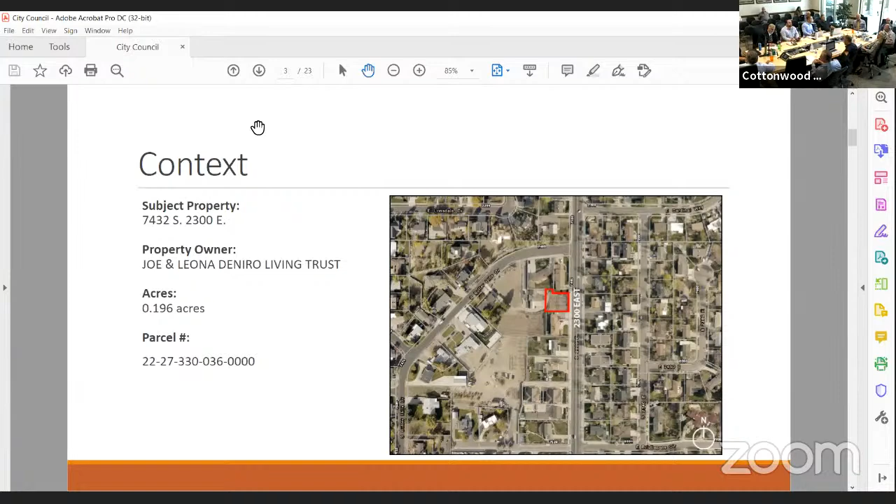Until very recently, it was part of a larger property that was just subdivided off. So there's an individual parcel now that fronts on 2300 East that does not extend back into the neighborhood. It's a little small, I apologize, but the current zoning is R18, and you can see along 2300 East it's about the only portion that is R18.

The request is to amend the land use map from residential low density to residential medium density, which would pave the way for a zone change from R18, single family residential, to R28, multifamily residential, but no more than a 2-family dwelling. So a twin home or duplex type of use would be appropriate.

As you can see, the whole surrounding area on 2300 East is already zoned R28. The reason this one was not, at least partially, is that in the last 10 to 15 years, the parcel arrangement on this lot has changed numerous times and parcels have been consolidated. I've got more information on that in a second.

The outline in red - when the application was made, that parcel was not its own parcel. But one of staff's requirements was that before final action was taken, it had to actually be a parcel to be rezoned. So that subdivision process has been completed. It is its own parcel now, so this does not affect the larger piece to the west.

The current land use is residential low density because of the larger piece it was previously connected to. The proposal brings it in line with the rest of the land use along that street.

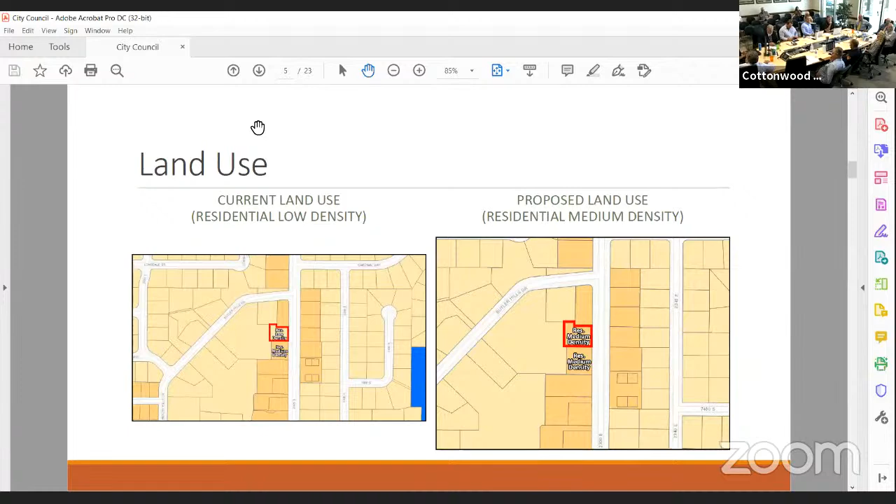So now we get into the history here. When the application was made, before the recent subdivision, it was 1.7 acres, a single family home, and some orchard kind of farm agricultural use there.

We've got some parcel history here. The outline in red is the parcel as it existed - the lighter red shading is the larger 1.7 acre parcel, and the dark red outline is the new parcel that was made. But historically, this was 4 different parcels in a much different configuration.

The dashed lines represent the old property lines. This is the new subdivision that was made, that's been approved. And these are old maps from 1998, right before incorporation, which still showed that old parcel configuration with 4 separate parcels instead of one large one.

Even in the original 2005 Cottonwood Heights zoning map, that whole corridor shows as R28, matching this line right here. So the R28 followed this line of parcels, and you can see this area would have been covered by that.

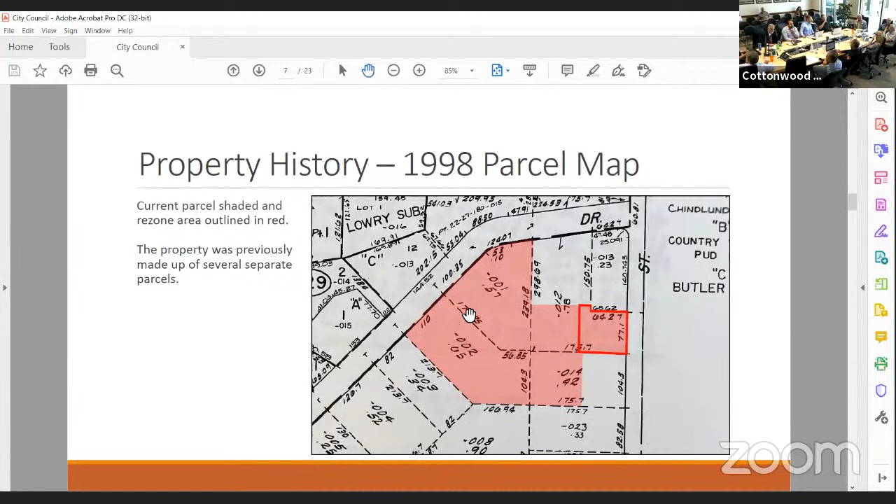We think what happened is when these parcels were consolidated over the years - we don't have any record of that coming through city process - when these pieces became one large piece, they took on the zoning attributes of the larger piece, the R18, and became zoned R1 just because of those property changes.

But this is in line with the context of the area, and actually matches the original zoning map of Cottonwood Heights, fitting the area pretty well. The R28 zone is a standard 2-family residential zone, so a single family home can be built there, but a 2-family home can also be built. I believe the applicant has stated his intention is to build a twin home on that smaller parcel.

Staff recommends approval. In early June, the Planning Commission also voted unanimously to recommend approval of both the land use map amendment and the zoning change.

We had initially received a few comments with concerns over high density housing, and I think there was some clarification provided between the written comments and the meeting, or maybe some worry that the whole parcel was being rezoned. But at the actual Planning Commission meeting, the comments shared were largely positive. Staff recommends approval, and the Planning Commission does as well.

And for those in the audience who are listening, referring back to your map, the properties directly to the south and directly to the north are also R28.

And currently, if I'm not mistaken, they are duplexes now or twin homes. Yeah, many of them are. I don't know that all of them are, but certainly across the street there's some twin homes, and even just to the south. Yeah, there are twin homes in the area. There is a precedent here. So this fits with what exists. We're not going to be an outlier in any way.

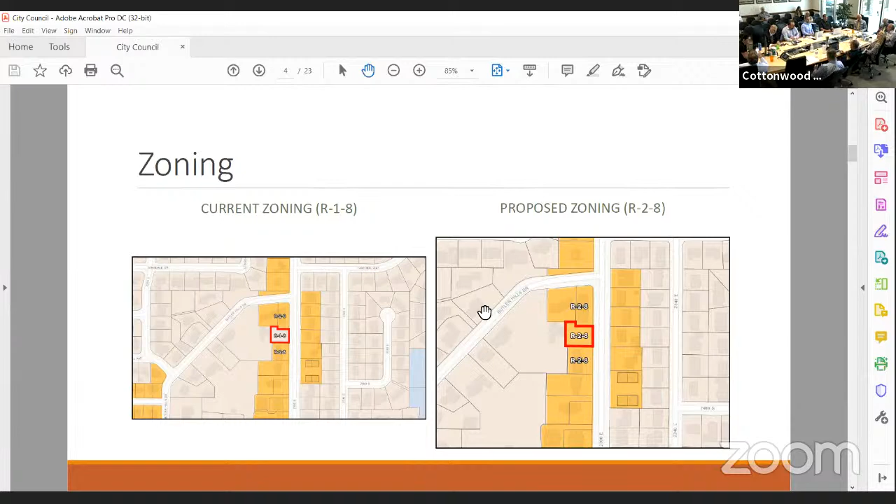The concern would be if this wasn't parceled off and you had that full large property be rezoned. That's a little different. I'll be honest, I get a little bit of a disconnect from that 2005 zoning map he showed us, because this specific parcel was one we discussed back and forth extensively in the general plan creation process, because it kept flipping for us. We're like, no, the people on Butler Hills didn't want the R2 going back there. So we'd put it that way, and then it would say everything on 23rd East is, that's where we kind of got that was all this one parcel.

This was scanned, we just scanned the hard copy that came with the plan. I remember this specific issue, and that's why my first question is, Michael, are they going to actually get the subdivision done? If the subdivision is done, then I think it makes sense that this gets to match what else is along the street. There was a lot of concern with the neighborhood back on Butler Hills Drive on adding R2 onto that street. But on this particular parcel, planning commission's looked at the details, taken comment, staff's looked at it.

Council, any concerns? To me, it seems only logical. So this is a two-part item, because it was originally low, and R1 to R2 is between low and medium density, right in that crossover area, which is the threshold for the land use change. So this is two separate items, which is why there are two ordinances. What, 2/10 of an acre? It's 0.196. Yeah, there it is.

All right, any questions of Mike? Is this its own, it's its own separate subdivision now? Yes, it's a 1-lot subdivision essentially.

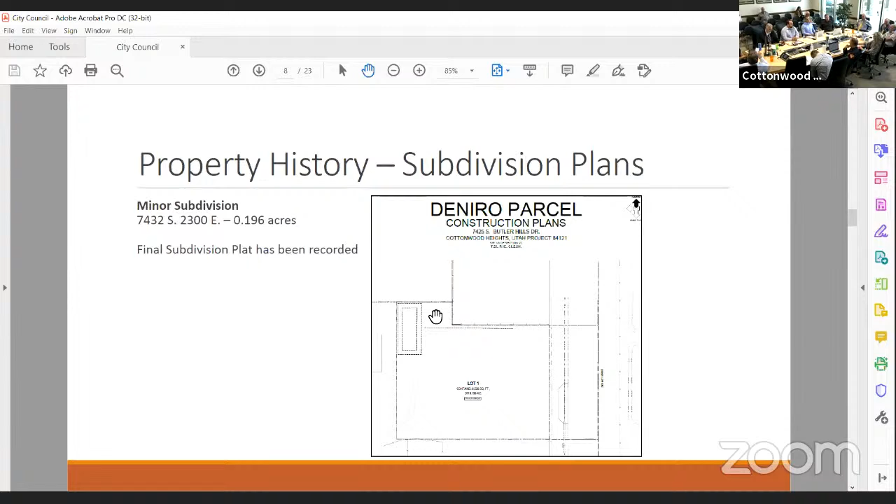Some of that, Doug, may also have been some residual concern, since it was a fairly significant item in 2005-06, but a lot's changed since then. The lot literally has changed. Well, and this fixes the issue, it's broke off, now there's a hard line there that resolves that issue more clearly. And it fits. I always look at it from more of a layman's perspective, what is the existing conditions adjacent to the area, and it seems to fit. Yeah, it does, it's pretty obvious to me.

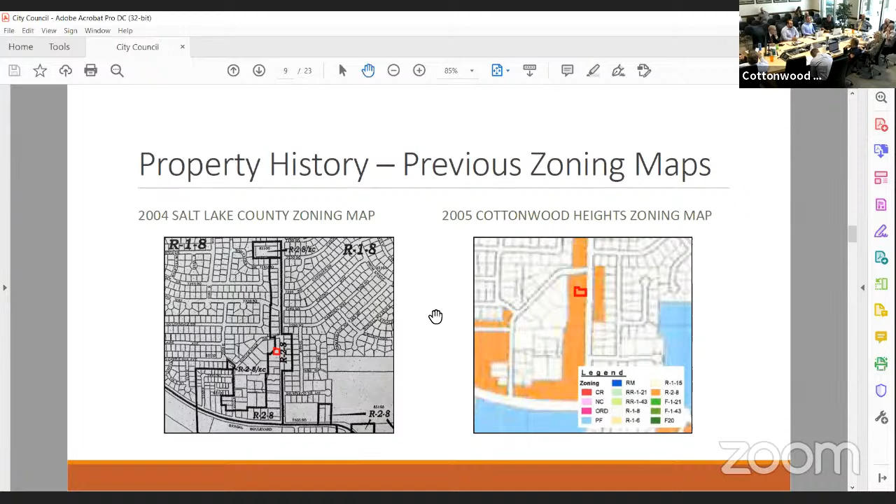Okay, thanks Mike. Moving on to one of my favorite topics of the last couple of years. Item B, accessory dwelling units discussion. So we understand that, and for the council's information, again this is something we talked about a couple of years ago and came to a point where we agreed not to agree and didn't move forward. Then the legislature has now taken it up at that level and has put it back on us to adopt an ADU ordinance with some parameters.

So in the last legislative session, House Bill 82, which is a building code regulation bill, the biggest impact this bill had, it had some changes to the building code, but it was all done to pave the way to allow accessory dwelling units in single family residential areas throughout the state of Utah as permitted uses. So a lot of this language is pulled directly from that legislation, or very closely to it. It defines internal accessory dwelling units as permitted uses in all single family zones statewide. It takes effect October 1st, and cities may adopt local ordinances. If a city doesn't, then it just takes effect everywhere in that city without any of the few limitations we're able to impose. It strictly limits local authority to prohibit and regulate. This is a slightly new term, IADUs, internal ADUs, or ADUs that are built into the footprint of the primary structure. So we're not talking about accessory buildings in the backyard, this is just the internal structure.

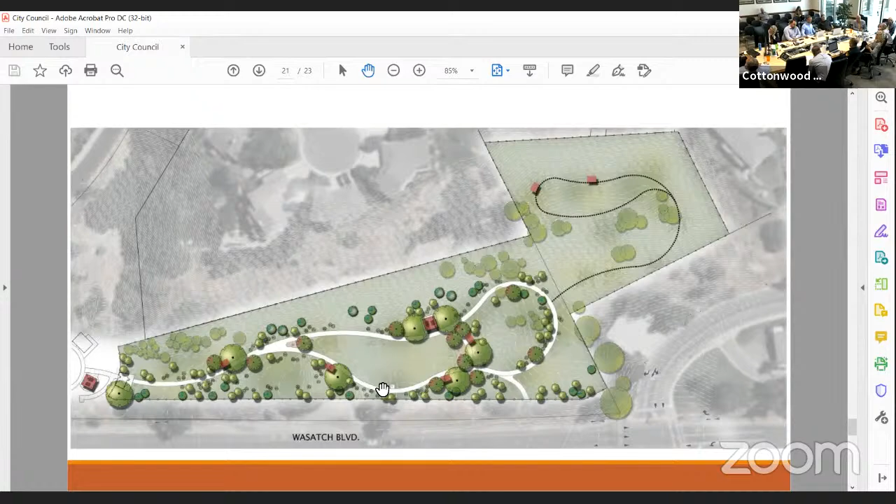Mike, I have a question. Many of the restroom facilities we have at parks will be locked down sometimes in the winter. I know this has a double gate at the front - is that parking, are those gates ever going to be used, and will that restroom remain open throughout the season, through any change in seasons? So the double gate is just for park entry.

That's just to get into the park, so you don't have one gate open and the dog runs out. What you should do is open the gate, take your dog on leash in between, close the gate, then unleash your dog and open the other one. That's what it's designed for, in a perfect world. That's what the double gate allows. That's what should happen, obviously.

But Doug asked an excellent question, and we found the same winterization issue we had down at Mountain View with the bathroom. Originally it was designed to be locked down every winter, and we've had to go back and retrofit them to be plowed and open. Obviously this one, we probably have the same question on the restroom.

Yeah, those are good questions. I'd say probably not, unless the council really wants to go there. There's elevation issues as far as plowing the path. We may not want to plow, but I think you want to look at the cost-benefit ratio of having them available 12 months a year, because it seems like wherever I'm going I'm getting complaints that the bathroom isn't open on some of our older parks.

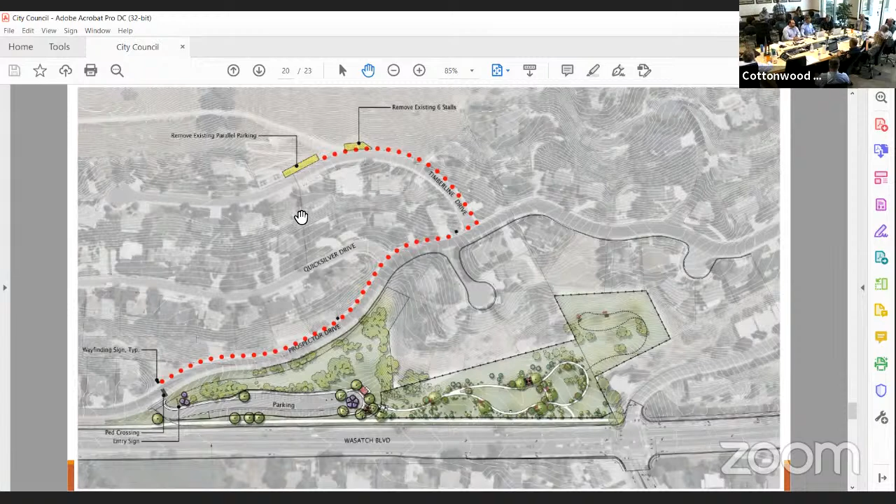Well, I'm excited for this. This has been a long time coming. It takes care of a couple of priorities of our city. Good job, guys. Yeah, I think that's all we have.